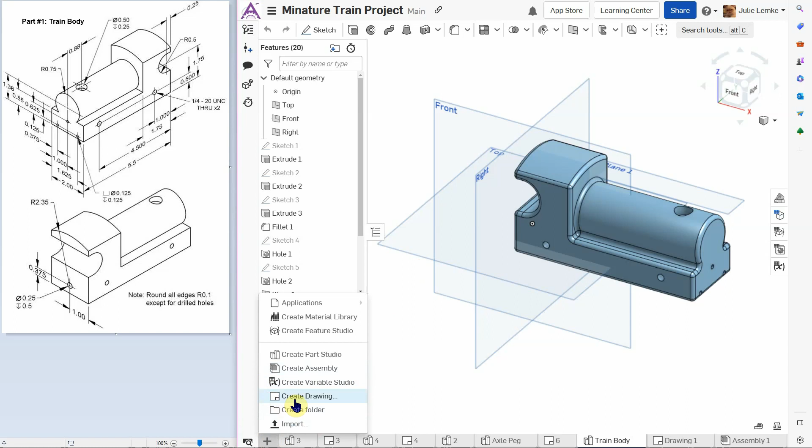In this video, I'm going to show you how to make the work drawing for the train body. So you're going to click on your plus sign in the bottom left-hand corner, and you're going to go to Create Drawing. This time, instead of using ANSI A inch, we're going to be using ANSI C inch.

The difference between these two is size A paper is the size of one sheet of printer paper. And size C paper is the size of, basically, if you had 4 pieces of printer paper taped together, that's how big it would be.

If you don't see this, you can just click on ANSI and then show Onshape drawing templates, or you could just be in all and show drawing templates. If you've used size C before, it will automatically be here like it does on mine, but if not, again, you're just going to have to click here, wait a few seconds, it'll load up with all of them, and just find ANSI C inch.

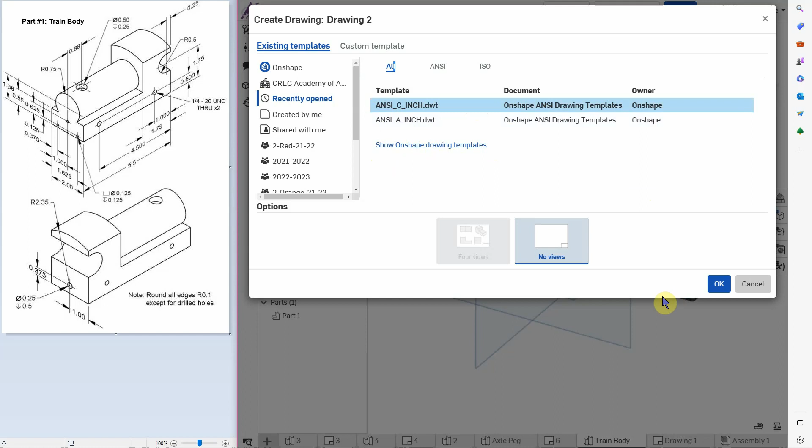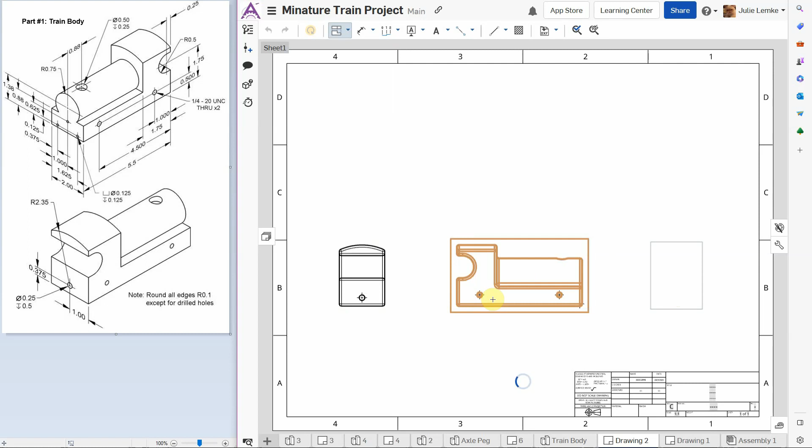Alright, so now I'm going to bring in my train body. So instead of placing the front view right here like I normally would, I'm going to place it more centered. The reason for that is we are going to place in a left side view here, our right side view, our top, and our isometric.

And if you forgot how to place these in, once you place in your front view and then place the next one, you need to click back on the front view to place in the other 3 views that you need. Alright, so what you could do to back out of this tool is actually just click on Projected View tool, or you can press Escape on your keyboard.

So from here, I want to add in a center mark for this portion right here that has been added in, and I want to add in a center mark for my train front end, well, what the end user would call the front end of the train. So this would be on the right side.

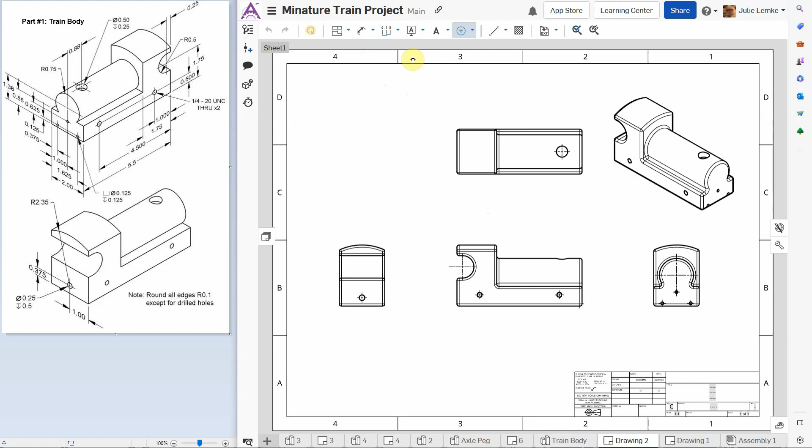Alright, so our next thing that we want to do is add in some of our dimensions. So for this, you're going to need to use the hole callout. If you don't see this one right here, hole thread callout, it's probably because your tools are smushed like mine are, and you need to find this little one that has like a 0, 1, 2, and then do the drop down menu and find it right there.

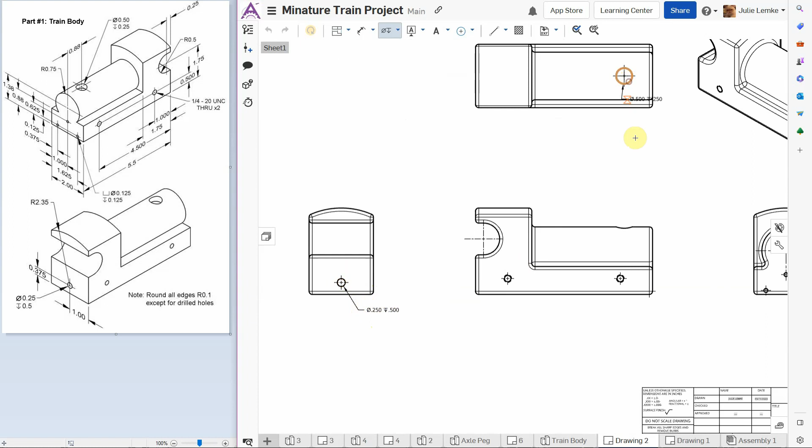So you'd have to go to the holes, and you'd bring out your information here. So we have the diameter and the depth for the hole. Same thing over here. And since all these ones over here are the same, what I can do is I can click on this. Oh, apparently I need to back out of the tool, so I hit Escape on the keyboard. Now I can click on that and scoot this over so you can see what I'm doing.

So because all of these are the same, I could dimension each one individually, but it gets kind of messy when I do that. So instead, what I'm going to do is press space and then capital TYP. That stands for typical. So that lets me know that each of the ones over here that are placed in are the same size. So this one is the same diameter and depth. Same with this one versus this one. Okay.

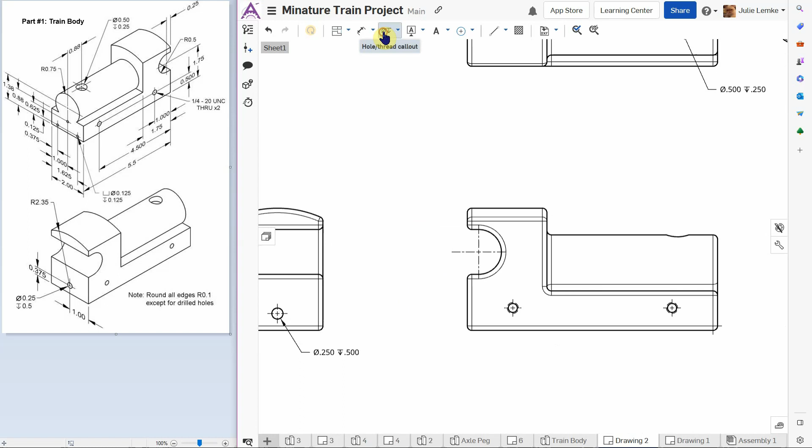So the other thing that we need to do, because that's all the holes that are placed in, we need to add in the information for our thread. Okay.

So for this one, we can see that we have all this information here. So we have the diameter of what the hole would be for this portion right here, and then we also have our thread information. So in some programs, when you're doing this, it'll only show you this bottom row where you have the 1/4 inch, dash, threads per inch, and then through. This program shows you what the actual hole size is and the thread information in one.

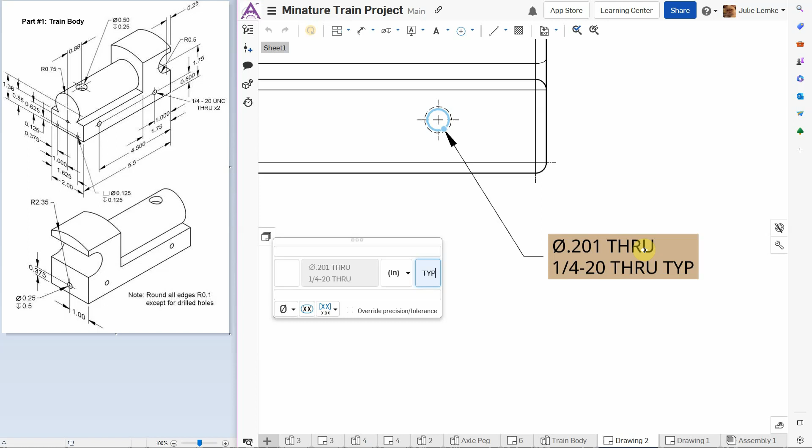And because we have the same one on both, we can actually do the same thing here. So space TYP. And apparently when it adds it in over here, it just adds it to the bottom one. So that's totally fine. All right, we also need to make sure that we add in our shading. So show hide, show shaded. We need to show our hidden lines.

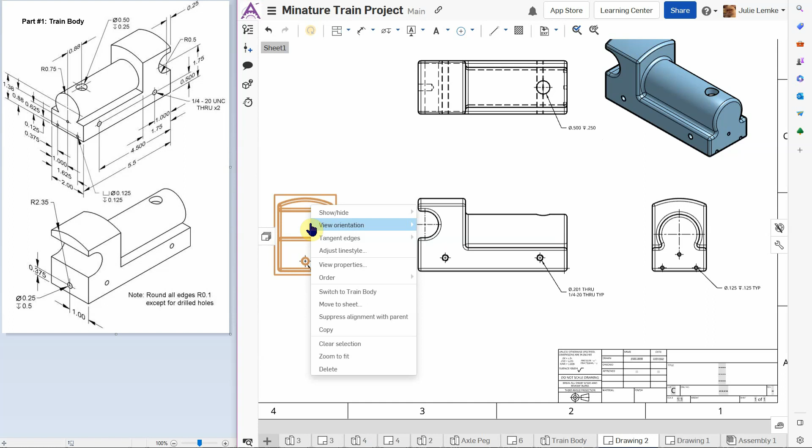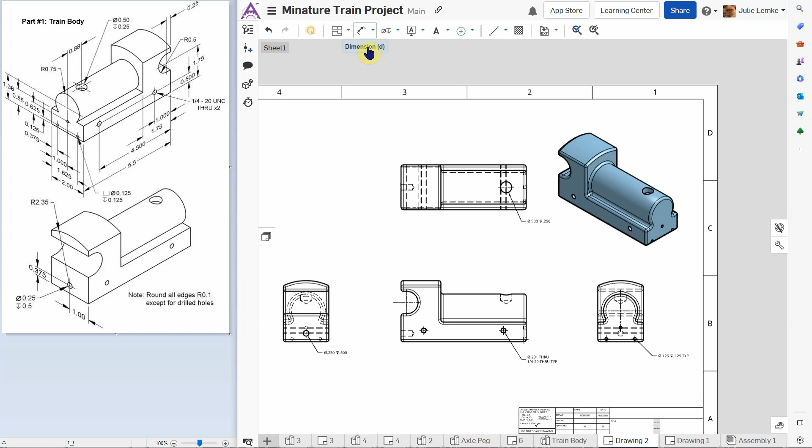All right. And when you add in your dimensions, because you're going to need quite a lot of them, you're going to need the size and location for holes that are drilled into your part. So I'm going to show you what I mean by that. So the size of it would be the diameter and the depth, and then the location would be something like this. So this lets me know it's 1 inch from this edge.

And you want to make sure you get the center mark of it. The reason for that is when you're dimensioning holes that are drilled into your part, you want to get it from the center of the hole. All right, and then you want to make sure that this is centered in between your dimension line, and same with this one. If there isn't enough room, I'm just going to move this off to the side as an example. If there isn't enough room in the middle, you're going to move it to the side. But this one happens to have enough room. So I can place it right there.

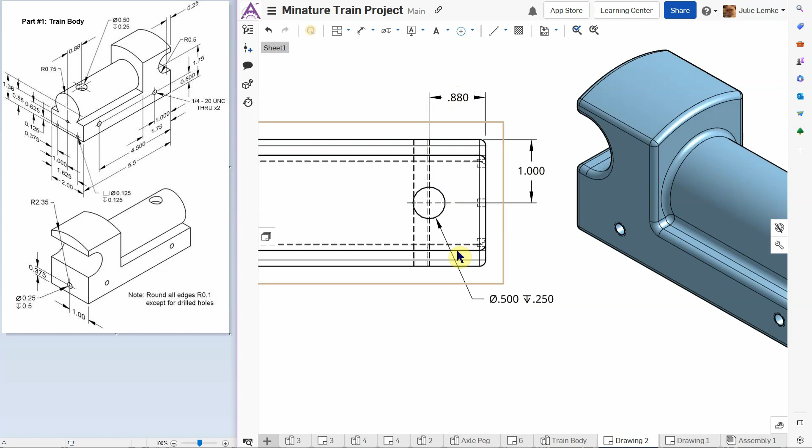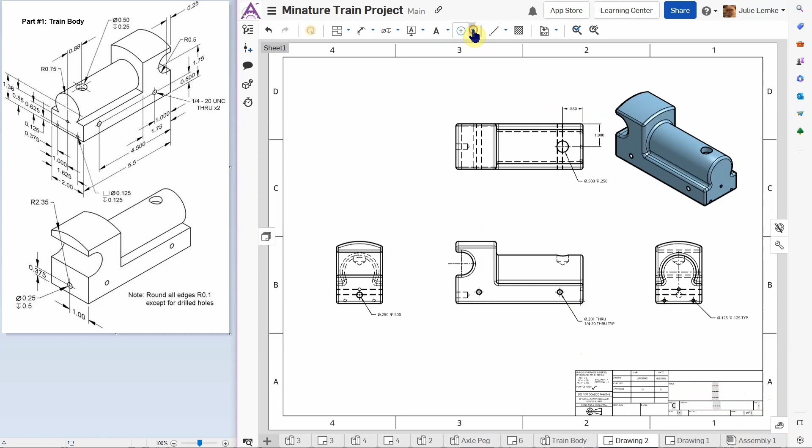And just so you know, if you're having issues moving this around, what you can do is do like a zoom to fit or zoom to window, zoom to sheet. All I did was right click to get this to pop up. So I'm going to zoom to sheet. So besides all the dimensions you're going to need to add in, also don't forget about your center lines. You could use 2-point center line or edge to edge center line for wherever you need your center lines. You're also going to need to fill in your title block. All right, so don't forget to do that.

So from here, you're going to add in whatever dimensions you think you need, and again, title block, and you might possibly also want to change where it says drawing 2 in my case to whatever makes sense for yours. So you could put train body or maybe work drawing part 1, something like that. All right.

Okay. Oh, one last little piece that I want to add in that I just realized that I didn't say. You're going to want to put in a note for the information that is right here. So you're going to just type in, I'm not going to do this right now, but you type in note, round all edges, R, capital R, 0.1, except for drilled holes. You could put that over in this little section over here.

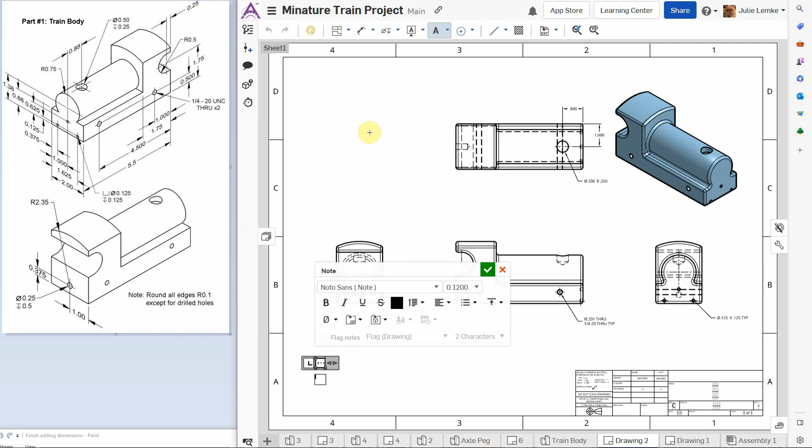That'll be a lot easier to put in than going through and trying to dimension every single round that was placed in. So all the pieces that you added in with the fillet tool, it'll just make it very messy if you try to add it in all separately. So don't forget about that little bit.